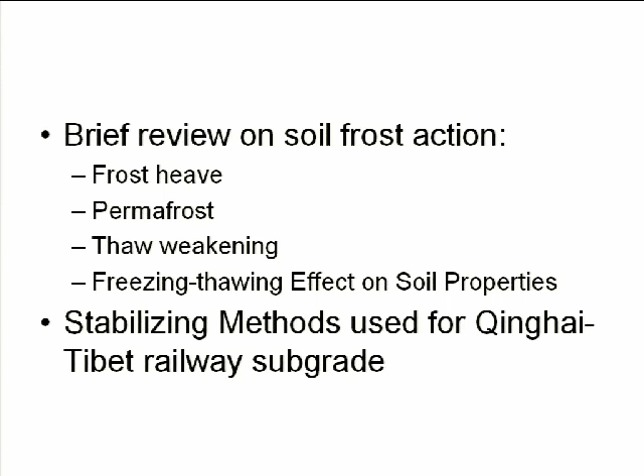Probably you know or not, nearly 50% of the world's land is located subject to the freezing soil effect. And among them, 25% is permafrost. This is mainly in Alaska, Canada, and Russia, and in China, in Tibet. In Tibet, it is because of very high altitude.

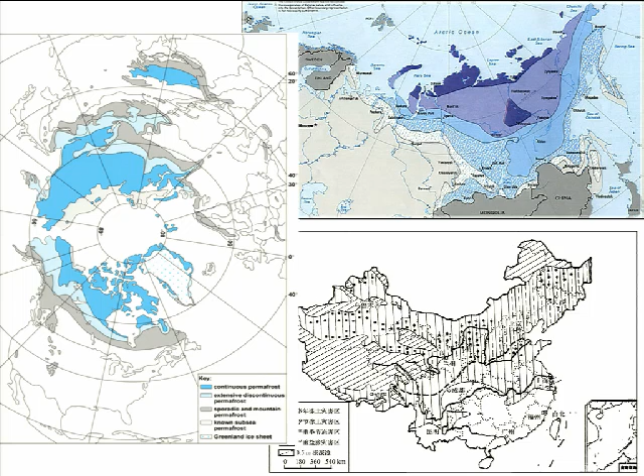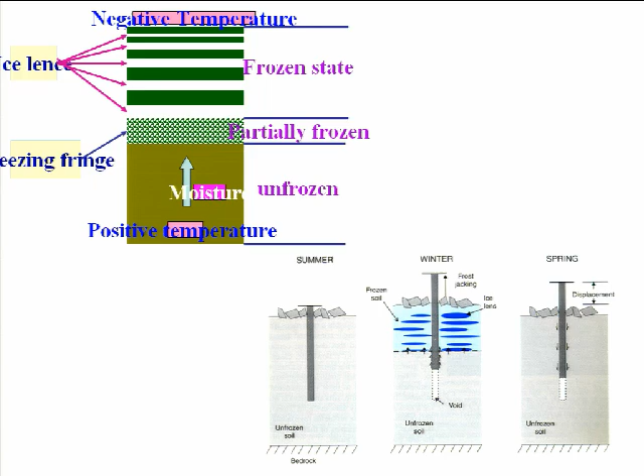This is bad for our civil engineering. Suppose you have a pile constructed in summer, in winter probably you will have it jacked out, and in the spring again it will become unstable. And this really happened in reality.

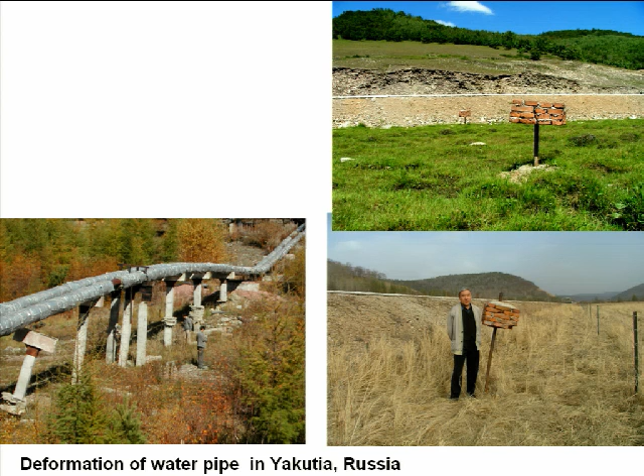When the soil freezes, very big negative pressure occurs. Probably you know many people are studying unsaturated soil. In unsaturated soil, traditionally we have that much negative pressure. For soil, when temperature goes below 0, they will get that much. So for unsaturated soil, I think it's easier. For our frozen soil, it's much, much more difficult.

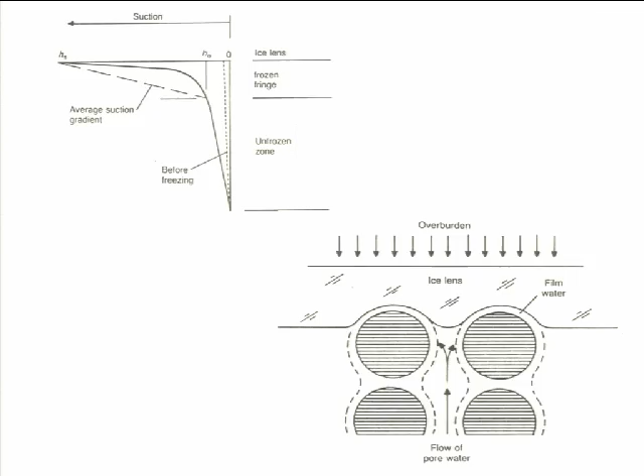How to predict the frost heave? Suppose you have a soil with porosity of 40%, and all this water becomes ice. It has only 3.6% frost heave. But in reality, you observe much more frost heave. This is because this kind of water migrated from beneath to the front should be taken into consideration.

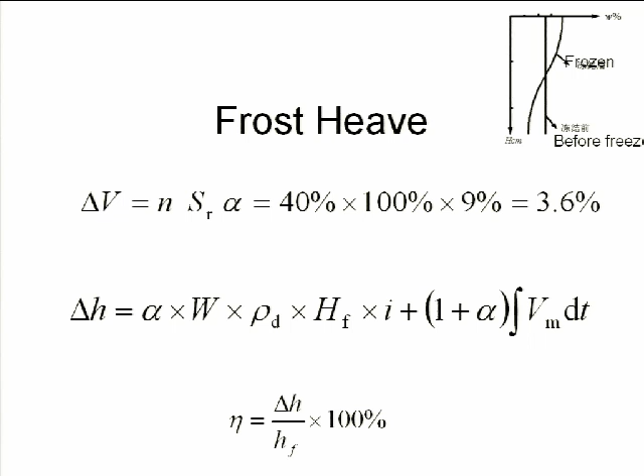This kind of problem is not only interesting for civil engineers, but also interesting to mathematicians. Because suppose you have a physical domain, you have a frozen soil front moving from one side to the other side. This side is frozen, that side is unfrozen. The physical and mechanical properties will be quite different from one to another, and you have a moving front. This kind of problem is very interesting for mathematicians.

You have several processes: thermal transfer and heat transfer and moisture migration, and this temperature and moisture change will lead to the change in stress state. So it's a very complex process. It's actually a coupled process.

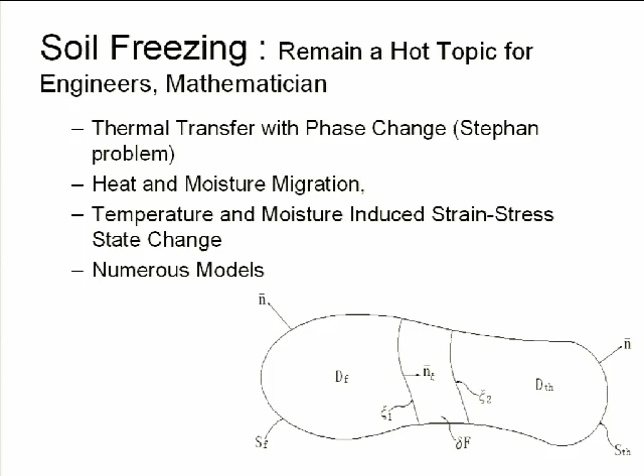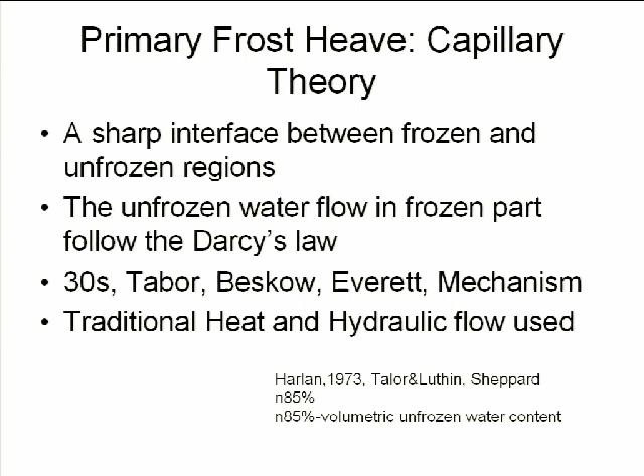Usually, traditionally, we have two theories to predict the freezing-thawing process. The first one, the traditional one, is called primary capillary theory. In this theory, a very sharp interface between the frozen and unfrozen regions exists. The water flow in the frozen part was also regarded to obey Darcy's law, so it is easy to use the traditional equations. All these professors used this theory to predict the frost heave. They just give a criteria for how much water becomes ice.

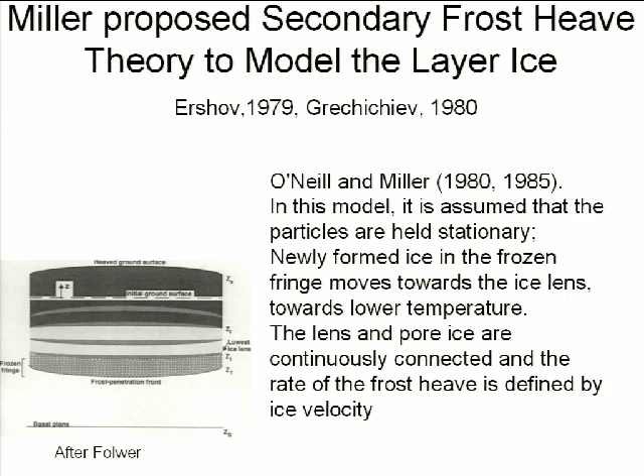The secondary frost heave theory predicts the real occurred layered ice. In reality, you usually find one layer ice, one layer soil, one layer ice - that's the reality. So in this model, it's assumed that the particles are held stationary, and the newly formed ice in the frozen fringe moves towards the lower temperature. The frost heave is defined by the ice velocity. This is also called a rigid ice model.

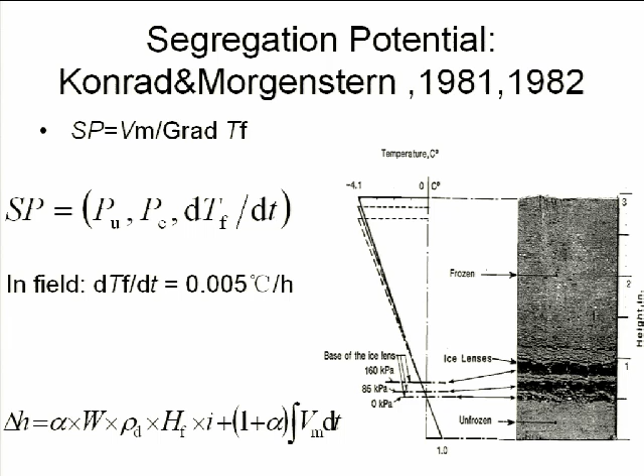In the 1980s, Professor Konrad from Canada proposed the concept of the ice segregation potential. The potential is the velocity of migration of water over the temperature gradient. This potential can be measured in a laboratory for different soils, and having this potential you can define this velocity. So this kind of migrated water can be computed for the one-dimensional case.

Nowadays there are many models to predict frost heave, but no one gives very perfect results. The most successful is the laboratory one for the one-dimensional solution. But in reality, what we need is a differential frost heave, and it's very difficult to predict.

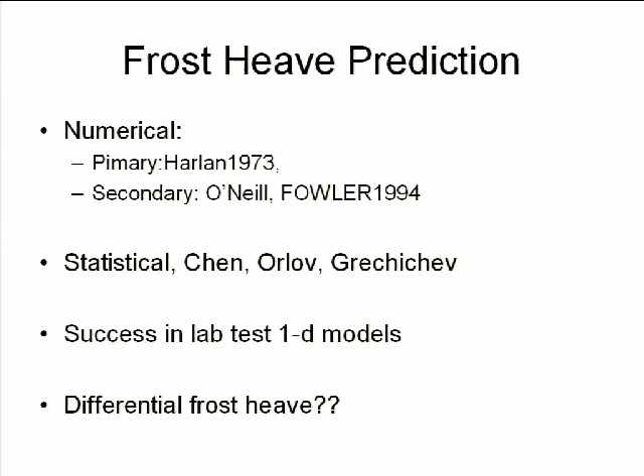The permafrost - for soils permanently in a frozen state, usually we study the deformation and the strains. This is Professor Tsytovich, a professor from Moscow Civil Engineering University. He actually began this foundation - soil mechanics, frozen soil mechanics, and rheology, long-term strains - because all the deformation and strains will depend on time and depend on temperature.

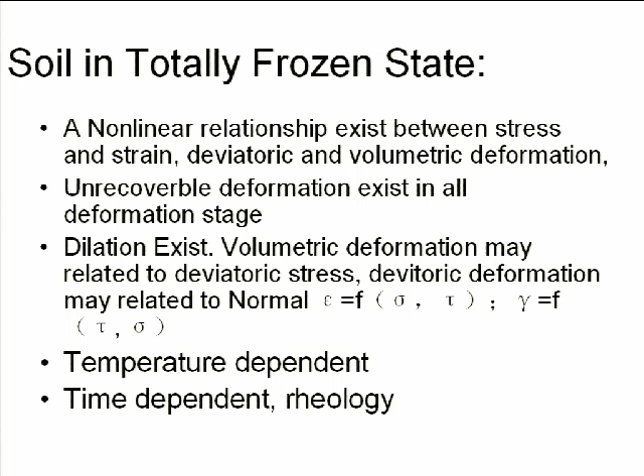So these are the two very specific features: temperature dependent and time dependent. Suppose you have sand - for sand usually we have a strength envelope like this, right? But in the frozen state it will become larger. The friction angle envelope will look like this - much higher. But when the confining pressure is higher, it gradually transitions to the original one. This is because at higher temperature and confining pressure, the ice will thaw.

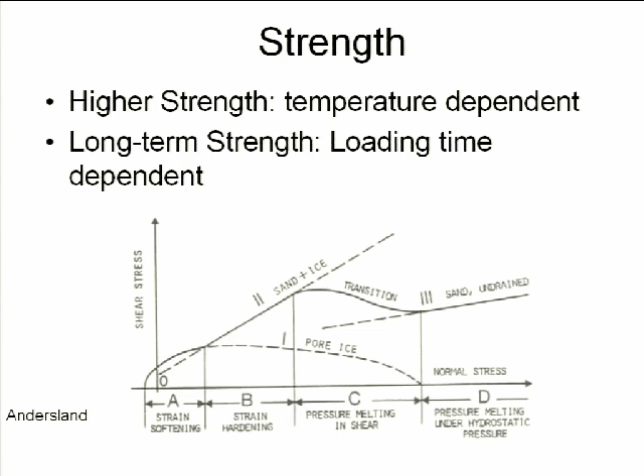Professor Vialov from Moscow Civil Engineering University also wrote a book. He actually began in the 1950s with the rheology of frozen soil, and in 2004 he published a new book when he was nearly unable to see anything. He just dictated all his theory from memory - his assistants wrote down the whole book, and my students and I translated it into Chinese.

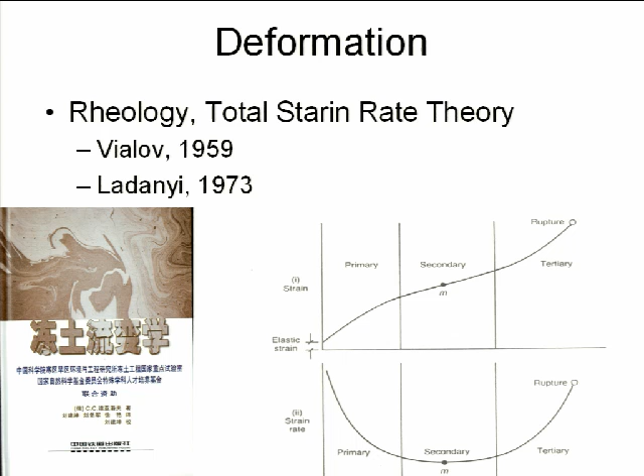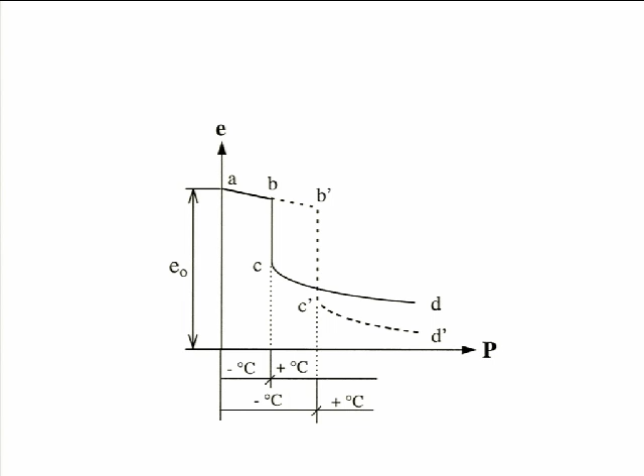This is the typical strain rate relationship. For thawing soil, when the soil goes from frozen state to thawed, you find a sudden change in volume. Here, this side is in the frozen state, this side is in the thawed state. This is because there is a difference in density between water and ice.

The water is one, the ice is lighter, less dense. And there is also a difference in conductivity - for the ice, the conductivity is like this, and at positive temperature there is a sudden change here.

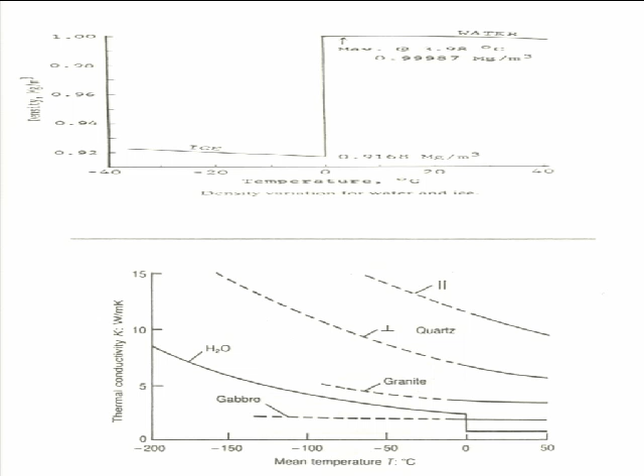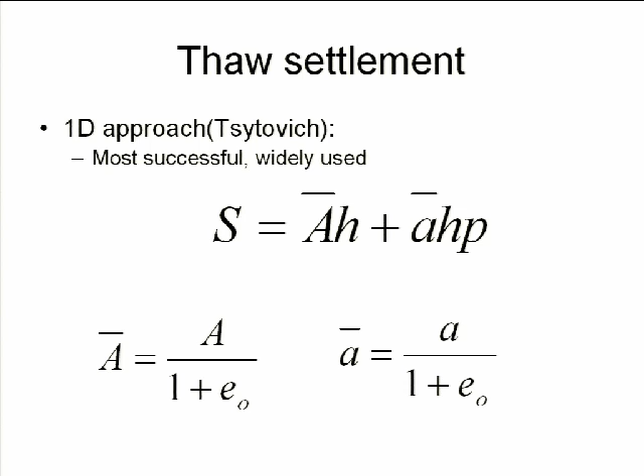Some professors gave an analytical solution for the one-dimensional soil consolidation process, when the soil is thawing from one side and there is a moving interface between thawed and frozen. Professor Zaretski from Moscow gave a very nice one-dimensional solution - this is the effective stress, this is the position of the thawing depth, this is the pore water pressure, and he gave a solution for the one-dimensional case.

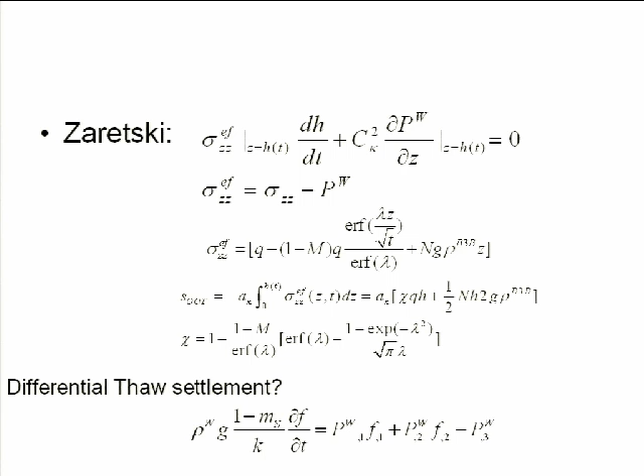But in reality, what we need is the differential soil settlement. He gave a formulation for the three-dimensional case, but until now nobody can give a three-dimensional solution for this soil consolidation problem. And the property of soil may change after many freezing-thawing cycles.

In some places, for example in Tibet, there's already a very big difference in temperature between daytime and nighttime. In the daytime it may be positive, and at nighttime it may be negative. So the soil is subjected to many freezing-thawing cycles.

Some people reported that after freezing-thawing cycles soil becomes looser, and some people reported that after freezing-thawing cycles soil density becomes denser. In 1998, Professor Viklander from Sweden summarized all this data. He concluded that loose soil after freezing-thawing cycles will become dense, and dense soil after freezing-thawing cycles will become loose.

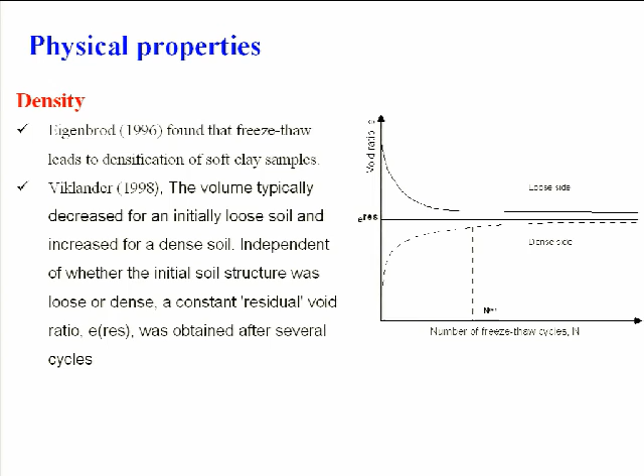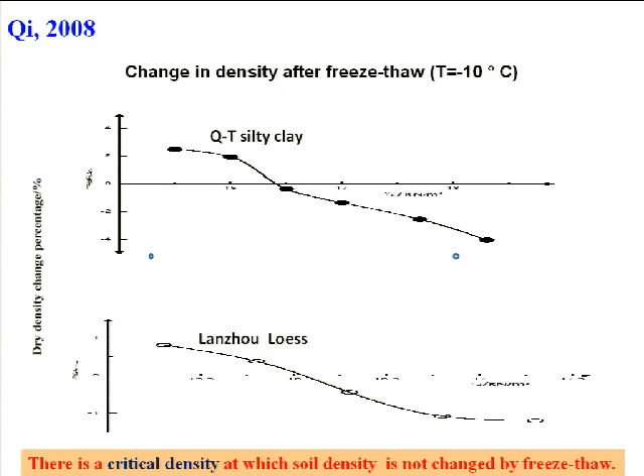Later results also support this opinion - originally loose soil becomes dense, and originally dense soil becomes loose, for these two kinds of soils. And for hydraulic properties, most people reported that the coefficient of permeability becomes larger after freezing-thawing cycles.

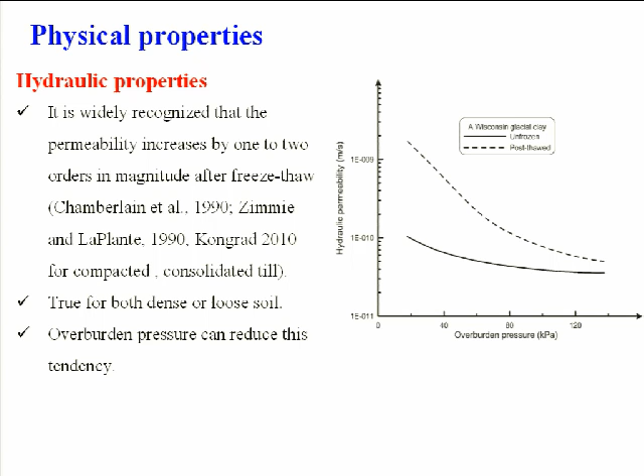And this is true for both dense and loose soil. And overburden pressure can reduce this tendency.

It is also reported that freezing thawing effects can erase the pre-consolidation effect. Originally, for over-consolidated soil, we have a pressure here, pre-consolidated pressure here. After several freezing thawing cycles, it will become like this.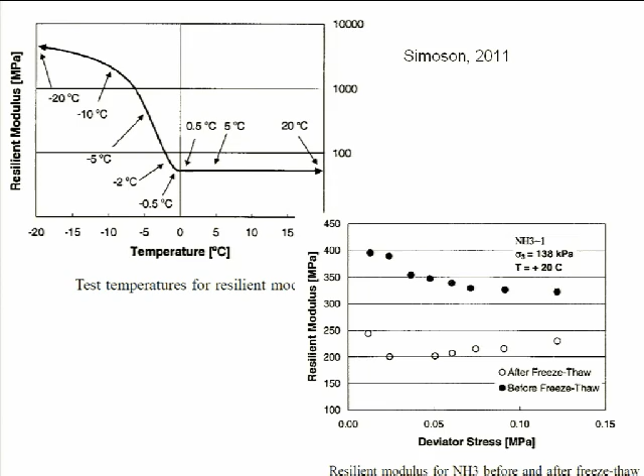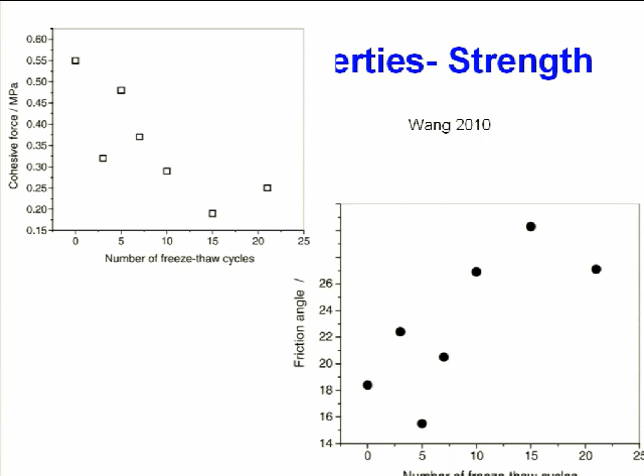But cohesive force also decreases with the number of freezing thawing cycles. This also showed that the friction angle is increasing after freezing thawing cycles.

Another professor, Qi, from China showed that for original loose soil, after freezing thawing cycles, the cohesion will increase, and for dense soil, it will decrease.

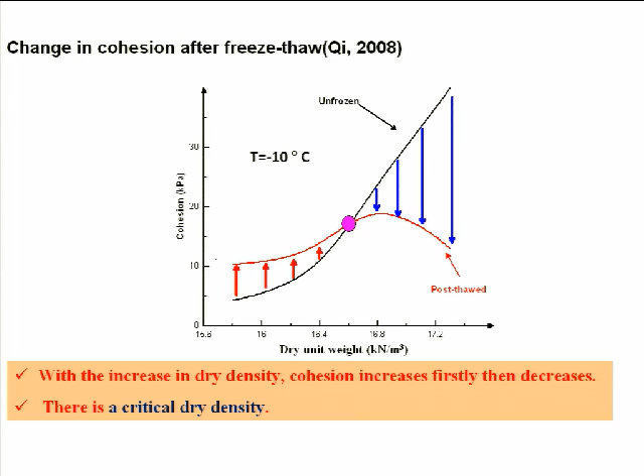Here it also tries to figure out the same tendency for the friction angle. So different authors for freezing thawing cycles give different results. So I suggest the test method should be standardized so different authors' results can be compared with each other.

Very few dynamic properties were studied for the freezing thawing cycle effect. Now I'll give a very small recent study for the Harbin-Dalian high-speed railway. In this part, from Harbin to the harbor city Dalian, we are constructing a high-speed railway.

This railway's design speed is 350 kilometers an hour. Slab track was used, no ballast.

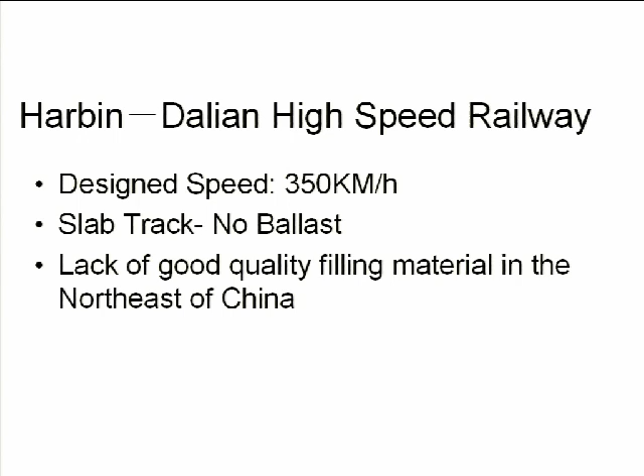For this kind of high-speed railway, usually very high quality fills should be used. But locally, in some cases, we don't have so much good material, so local soil was used. Clay was used, but with modification, using lime and cement.

The allowed deformation is 15 millimeters within 20 meters. So for this kind of soil, we conducted...

...dynamic triaxial tests. This is the measured stress on the subgrade. And a similar loading cycle was applied to the soil we used.

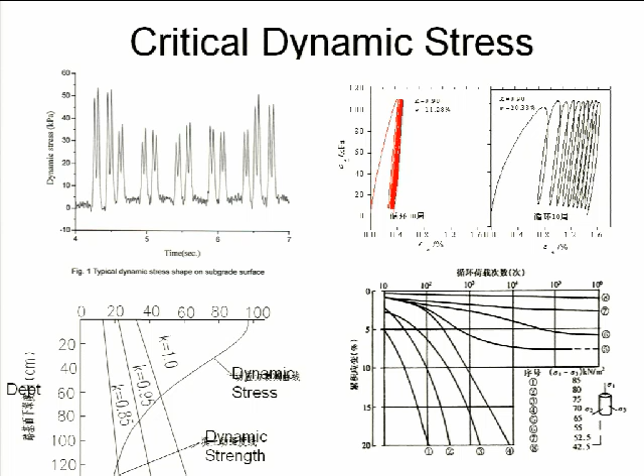There are two kinds of outcomes - if the deformation is like this, it's good, and if it develops very fast, it's bad. So between them there will be a critical meaning - we call it critical dynamic stress.

So for this original soil, we used clay. We conducted many triaxial tests, applying the pressure. We found that the critical threshold meaning is 230 kilopascal.

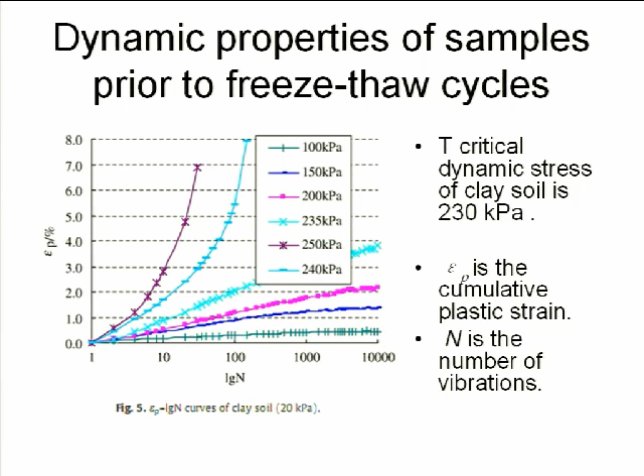And then to this clay, we add some lime or cement. When adding the lime cement, this is the blend ratio. When blending the lime and cement, the critical state, critical meaning, is increasing.

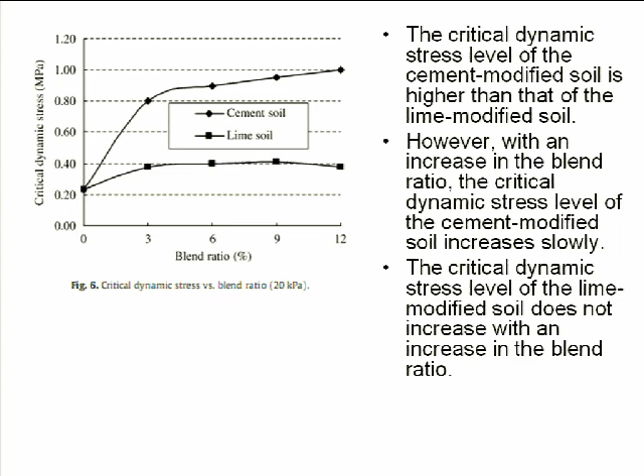It's for different blending ratios. So after this test, we also give an equation to predict how much the dynamic strength is reduced.

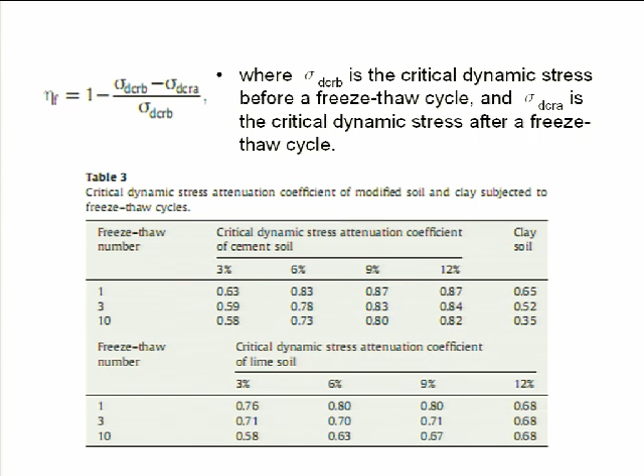And now a few words about the Qinghai-Tibet Railway. Tibet used to be the only province without a railway in the last century. In this century, the Chinese government decided to build a railway from Golmud to Lhasa.

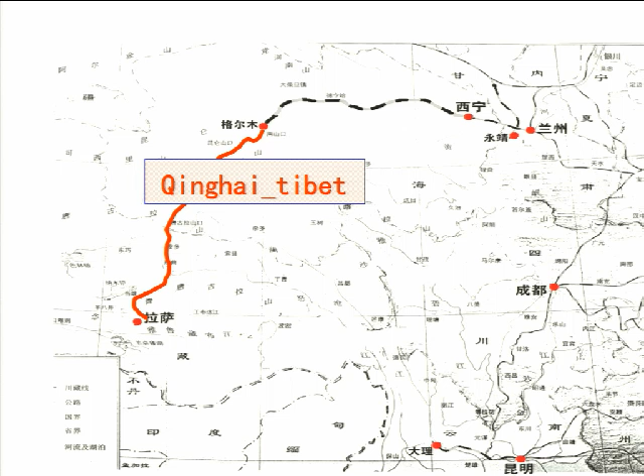The total length of the Qinghai Tibet Railway is 1,142 kilometers from here to here. But most of it is above 4,000 meters high, and half of it, from here to here, this part is located in the permafrost zone.

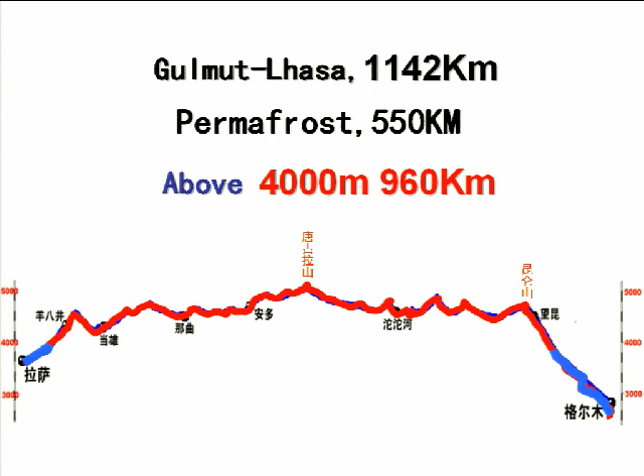Usually we have this kind of problem. So in Qinghai Tibet, you can find a very gentle slope, but it can collapse in winter. Very gentle, 7, 8, 9 degrees inclination, and you can have a frost heave.

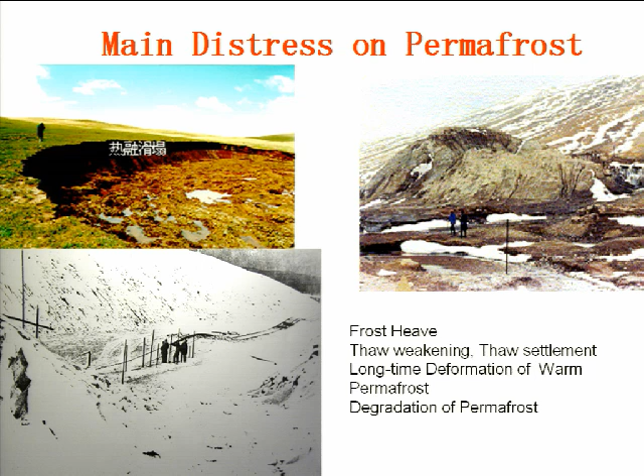This picture shows the railways in Russia 100 years ago. At that time, people didn't quite understand the frozen soil problems. This picture we took very recently - it's a new railway line in Russia after 3 years. This is a new line, actually, and this is because of degradation of the permafrost.

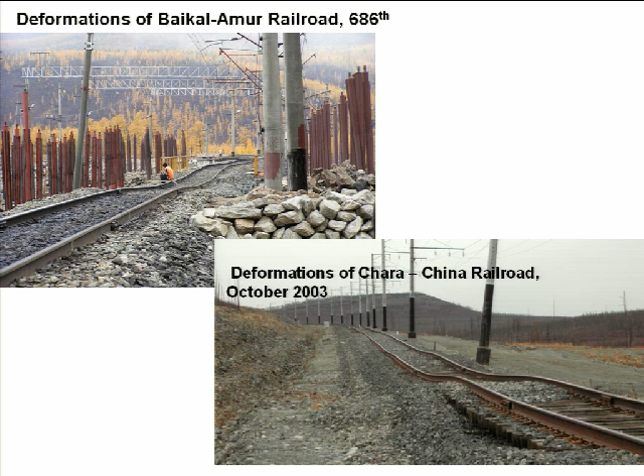Usually we have several factors influencing the stability of the subgrade on permafrost. This line we usually call the permafrost table. Beneath it, the temperature is minus.

The first factor for Qinghai Tibet, the most important, is the solar radiation. We have very high solar radiation in that area, so that part of the thermal effect caused by solar radiation is very, very large.

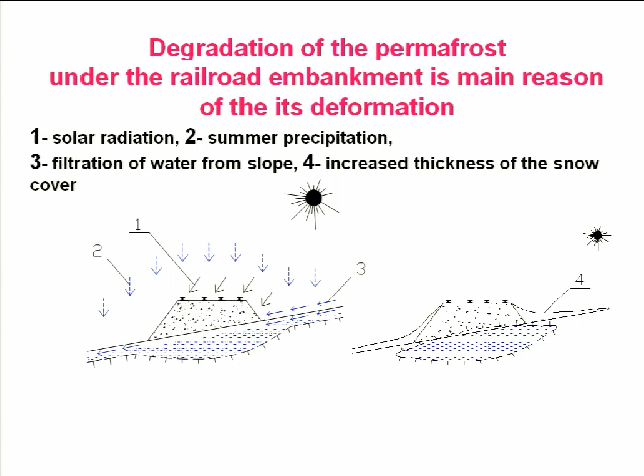The snow in the winter, in the first winter, is bad because it's like a quilt covering the subgrade.

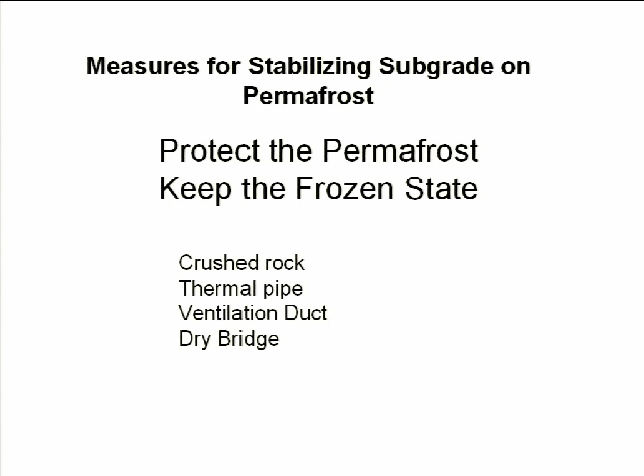So in Qinghai Tibet, the main principle is to protect the permafrost, because in a frozen state, the strength will be higher. We use several measures: crushed rock, thermal pipe, ventilation duct, and dry bridge, to protect the permafrost.

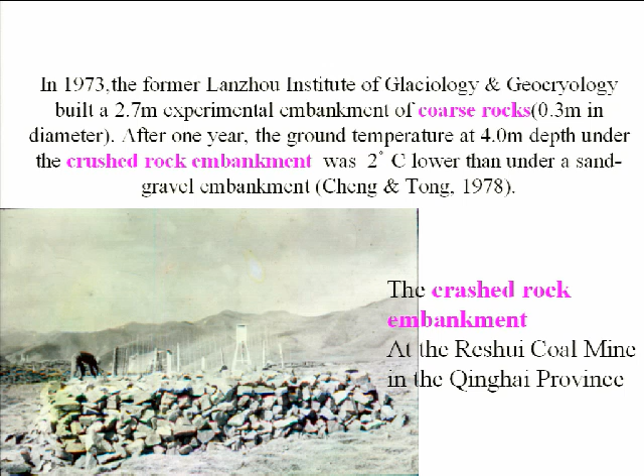Back in the 1970s, scientists in China had already begun their studies on crushed rock. They found that beneath the rock, the temperature is 2 degrees lower than the other side. In the 1990s, Dr. Goering from Alaska University also conducted an investigation on this kind of subgrade.

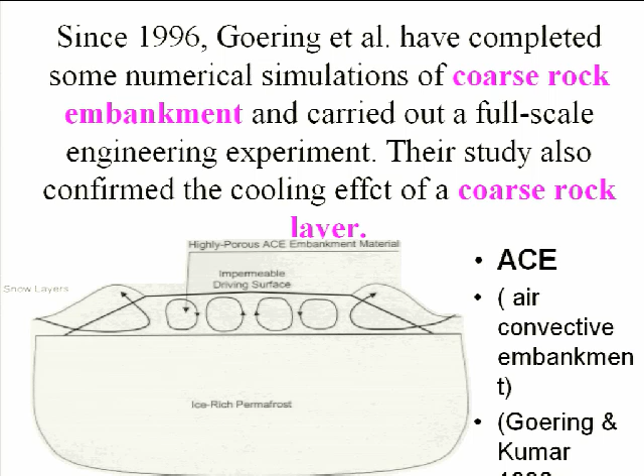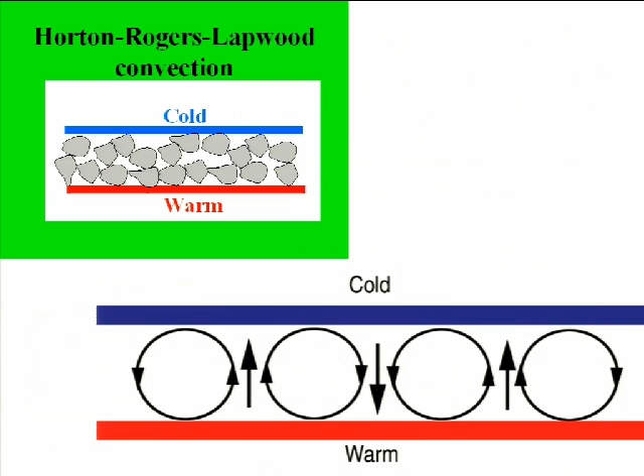They called it air convective embankment, ACE. Both his numerical simulation and experimental test showed a good effect in protecting the ice-rich permafrost. The main idea is using air circulation or convection to take the heat off.

So in China, in Qinghai Tibet, many places use this kind of method. At that time, people didn't quite know what diameter should be used, so two kinds - 5-8 or 40-50 - these two kinds of tests were conducted.

And many combinations of this. People are very interested - people use different amounts on both sides to adjust the differential settlement, because suppose this side is south, there will be more settlement. This side is north, will be less settlement.

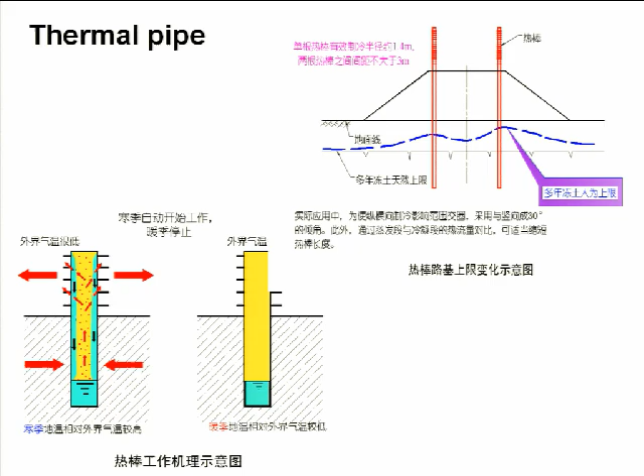These are cold water or some kind of liquid circulating in the pipes? Yeah, yeah, as opposed to the other pipe which is just getting the heat out. You have many of these kinds of devices - the Alaska pipeline, the oil pipe, is sitting on this kind of device.

Another measure is ventilation ducts, using cold air, hoping the cold air comes here and the hot air goes from this side. In this way, it takes the heat off.

And this kind of shutter was installed. This shutter is temperature memorized. When the air temperature is warm, it closes. So it's open in the morning and at night, and in the noon time it's closed.

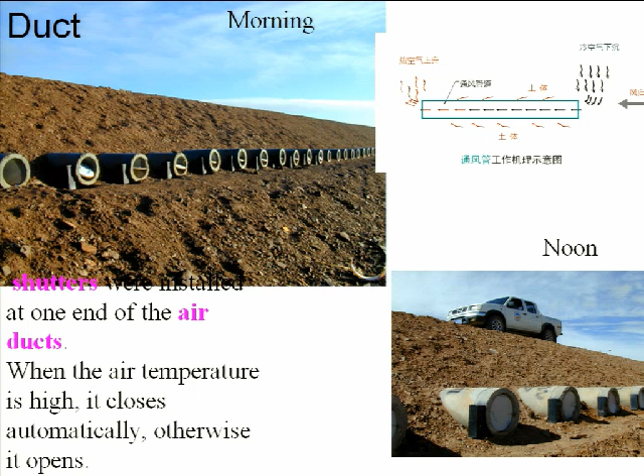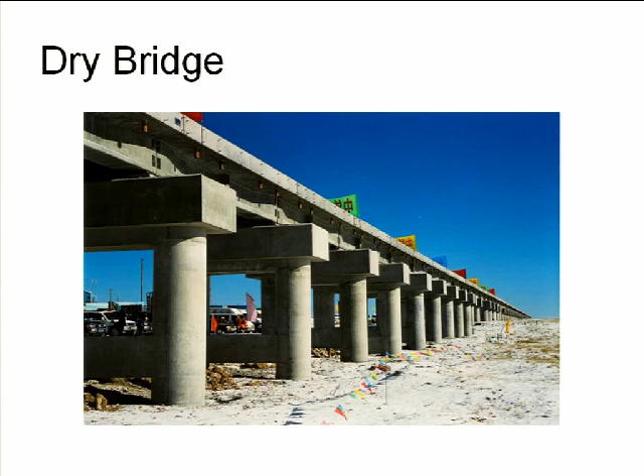This bridge is built not for the water to pass, but for no water. This is what we call a dry bridge, to protect the permafrost.

Another measure is shading. This is a hint from nature. In nature, you can find permafrost in the mountains. On the north side you have more permafrost, and on the south side you have less permafrost.

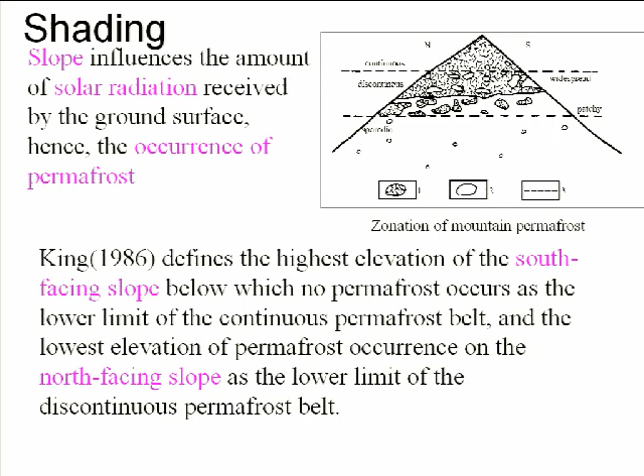Based on this idea, we suppose that if we cover the permafrost subgrade using some structures, it will be better. Many observation data show that it can be at least 3 degrees lower than outside. But this kind of structure was not used in the Qinghai-Tibet Railway because of the difficulties in maintenance and high costs.

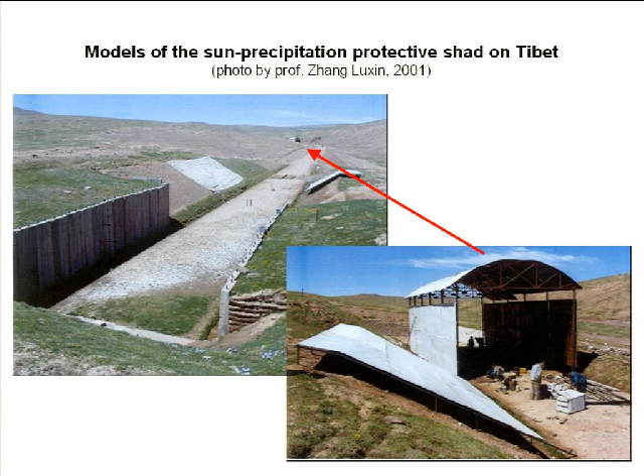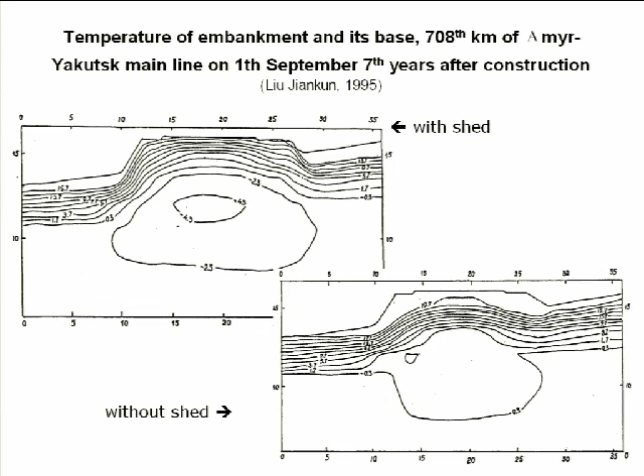This is a result we conducted by computation, comparing when you have shading and no shading. It's quite different, the temperature state.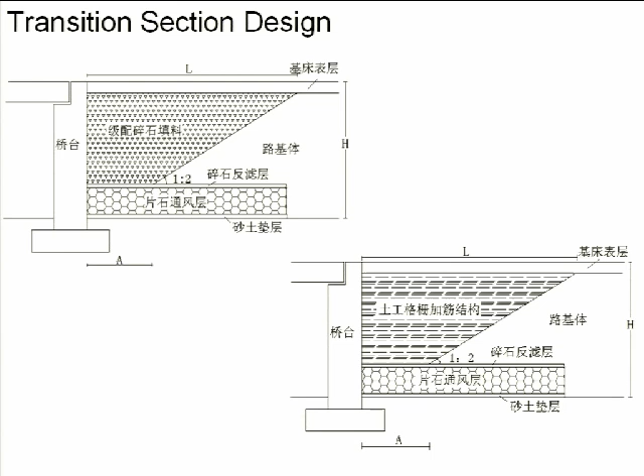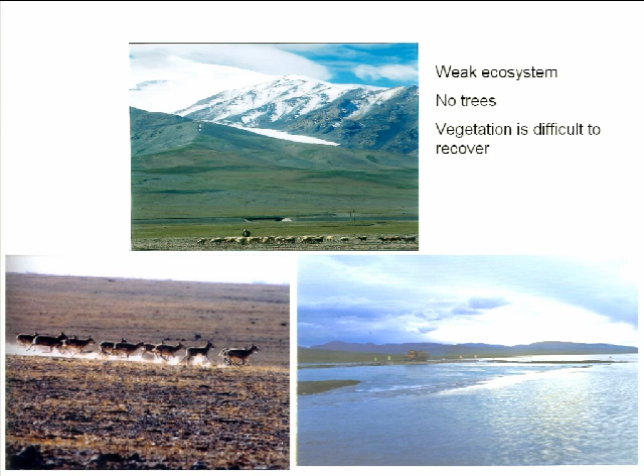The environment was also very well protected in this Qinghai-Tibet Railway, because in that part the ecosystem is very weak. There are many weak areas, no trees. Vegetation is very difficult to recover. If in this year you uncover vegetation, after 3 years you can still find that part exists. So it's very difficult to recover the vegetation.

Many corridors were designed to let wild animals, protected animals, go through. So for the subgrade, we are using very gentle inclinations for them to go through, and above the tunnel, beneath the bridge.

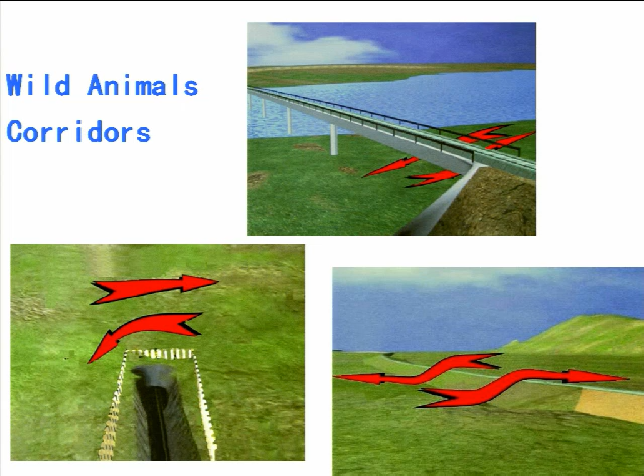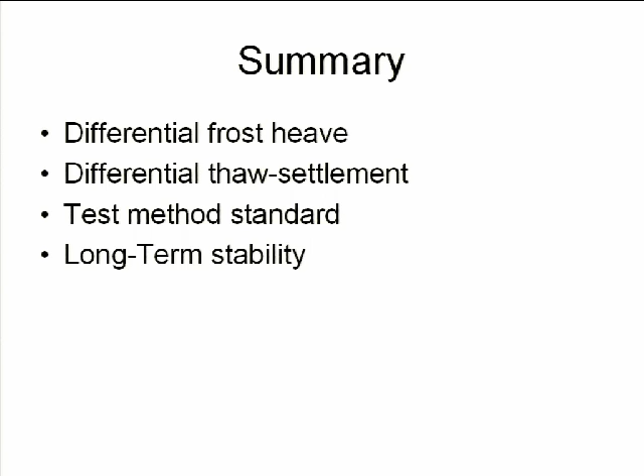To summarize, we need more sophisticated models to predict the differential soil settlement and frost heave. We need to standardize the test method for freezing-thawing cycle problems. And we need to conduct long-term stability studies for the permafrost subgrade. Thank you.

One quick question I had in mind: you showed those large rocks and different sized rocks as crushed rock as a means to control the temperature, is that right? Those embankment revetments and things you were showing, convection, I think you mentioned. Can you elaborate a little more on how actually this crushed rock, the porous structure, is keeping everything cool? What is the main mechanism? I'm trying to better understand.

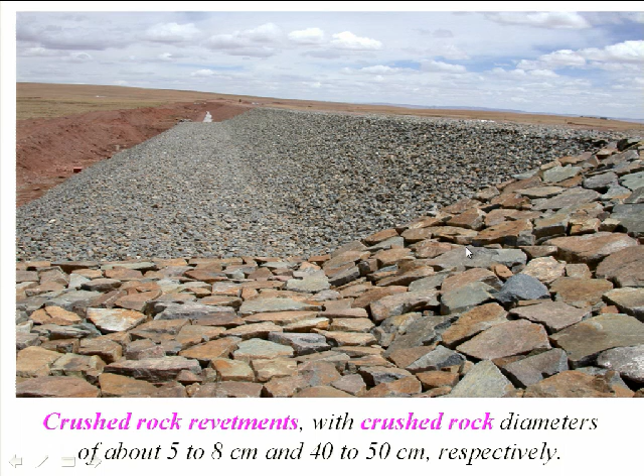Yes, we are using this kind of structure, hoping to let cold air form a convection in the pores of the crushed rock, and in this way cool the soil. So cold air is inside, the ground is cold, and you're trying to keep that cold from escaping, and the rocks are helping keep it cold. So we have observations beneath this crushed rock that the temperature really is lower than other parts.

Yeah, I think the idea is that you're transferring heat: if it's warmer, you're taking it out, and if it's cooler, you're switching the heat transfer the other way. So I guess you have to have something that allows air to pass through it. The rock gradation has to be open graded, or this won't happen, is that correct? Yes, but this problem is not quite studied because it was constructed very fast. It didn't leave time for scientists to study it. You mean the optimal gradation relation? Yes, that's a good question. Yeah, because if you get too dense, then there's no convection.

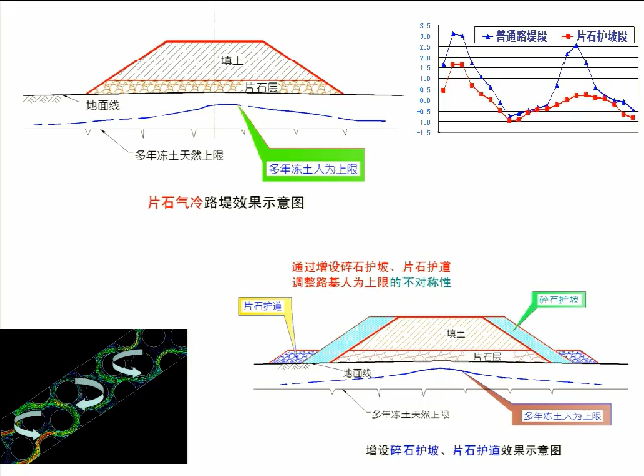Yes, in this part they tried this. This is the experimental part. They tried to figure out which one is better, what size is better, what maximum size and gradation. But there is no definite answer for this question. So they looked at the temperatures of the ground in different cases with different sizes of rocks. They are now regarding larger sizes as better. That makes sense.

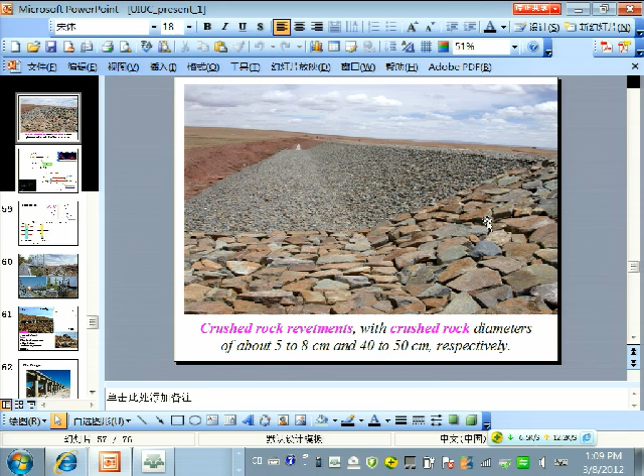The rocks there aren't there for structural purposes, they're just there. Is it all the way through the embankment? In some places the total subgrade embankment was constructed using this kind of rock, some places only from both sides, one side, or just the berm. Many combinations.

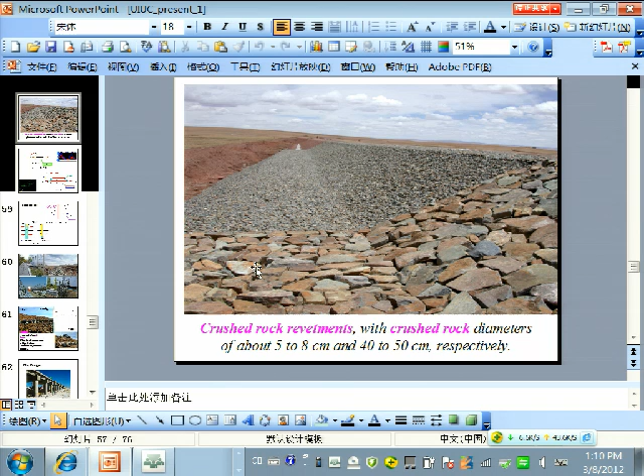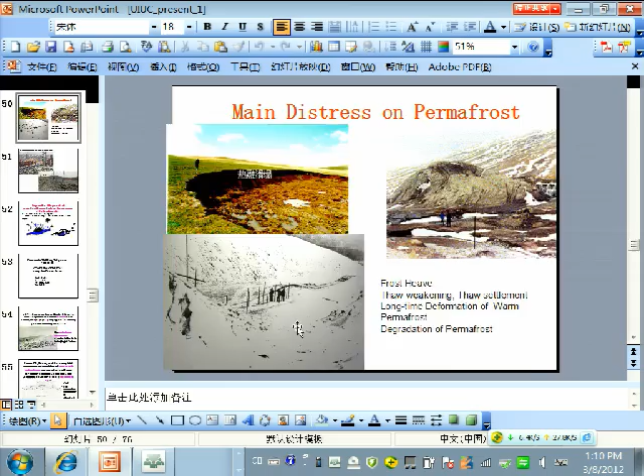So it sounds like the challenge with high-speed rail in these permafrost regions is more the embankment stability than whether you have slab track. Very good question. For slab track, it requires a very stable subgrade.

According to Chinese standard, the allowed deformation for the whole service time, which in China is regarded as 100 years, is that you must keep the soil from deforming more than 15 millimeters during that period. It's very difficult. The Harbin-Dalian railway also has this kind of problem. The frost heave already occurred because people didn't pay enough attention to these problems.

So can you comment on the design strategies to reduce the frost heave there? Just putting deeper layers of granular material? I personally don't like this one. Ballast is better because with ballast, any time something happens you can adjust, add ballast, or do something. But with slab track, when large settlements happen, the plate will be in bad stress condition, and it's very difficult to repair. So personally I prefer the ballast option.

But why are they using slab track? They regard it as very easy for maintenance work on the actual rail. Yeah, I was going to say that's one of the primary reasons slab track hasn't caught on in the U.S. - practitioners there like to be able to adjust their track and fix it, and that's difficult with slab track.

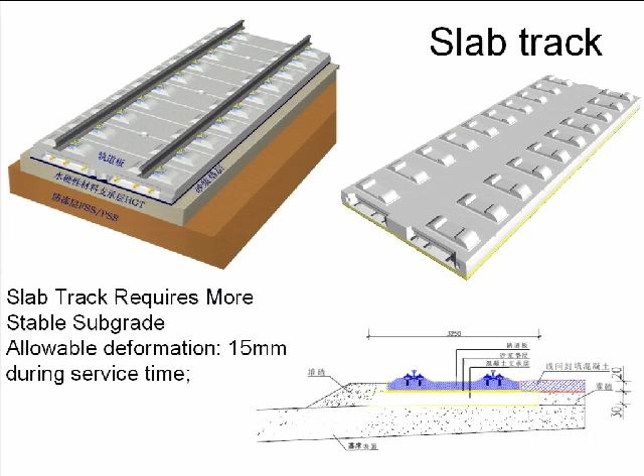Does the actual slab track system increase the amount of heat flowing down - thermal conductivity? I don't know about this, I'm not sure. But people are studying vibrations for permafrost reasons - some researchers are studying the vibration of the track structure and how much it increases the temperature of permafrost. They have some results - it really does influence the temperature of permafrost.

Any other questions from further back? Does anyone want to ask if they use asphalt for a rail bed - do you use any asphalt as sub-ballast or something? No, I've never encountered this kind of HMA track. I remember reading in Rose's paper, I think from JRC 2010, that there is some use of it, but it's not as widespread in other areas.